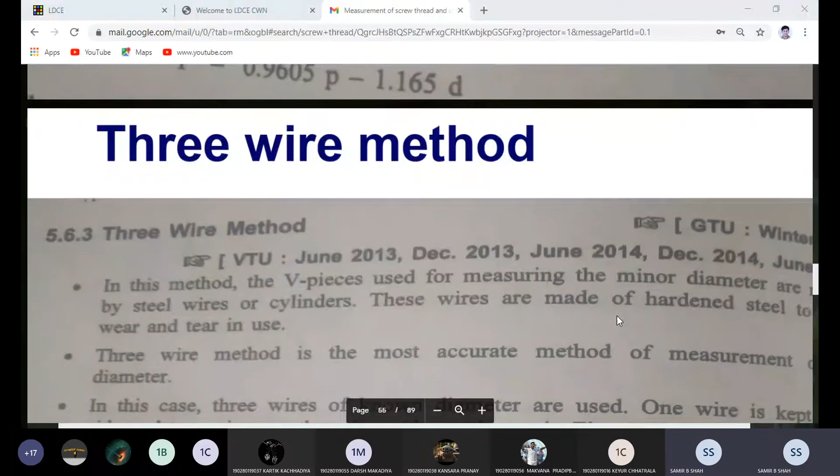2-wire method, we prefer the 2 wires. But let's talk about the 3-wire method, which is definitely used in place of the 2-wire method.

We have to use 3 wires as shown in the figure. As discussed, V-pieces are used to measure the minor diameter, which are replaced by the steel wire or cylinder. These wires are made of hardened steel to sustain wear and tear in use, as I discussed initially.

Remember that the 3-wire method is the most accurate method for measurement of pitch diameter. Sometimes it may be asked in your exam which is the accurate method to measure the pitch diameter, with 3 options like 1-wire, 2-wire, or 3-wire method. Then the 3-wire method is the right answer.

In the 3-wire method, as the name suggests, we use 3 wires. One wire is kept on one side as shown in the figure, and the remaining 2 wires are on the other side.

We also assume that the wire touches the flanks of the thread, and the micrometer anvil is placed parallel to the thread. This is the pre-condition when we use the wires.

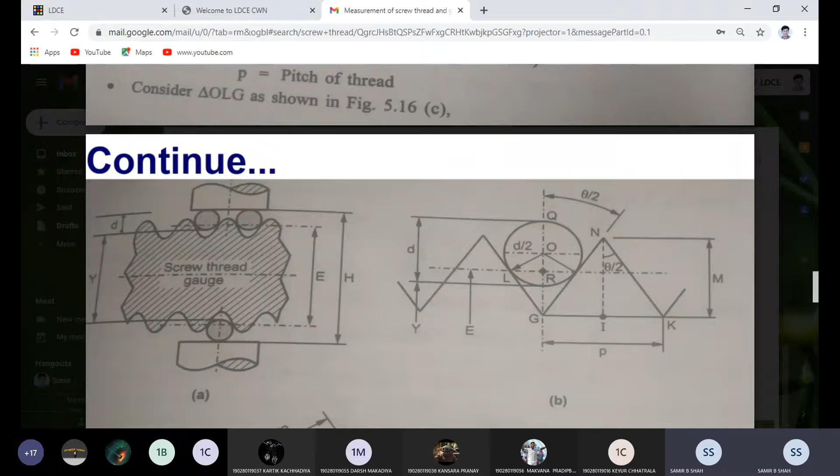It must touch the flank, all 3 wires, and the micrometer anvil is placed parallel to the thread axis. You have to also mention this, because in the one-wire method it is not mandatory to place the anvil parallel to the thread axis.

But here, this is the thread axis, and the anvil must be parallel to the thread axis. The wires are held in hand or hung from the stand so that the wires can adjust themselves under the pressure of the micrometer.

Now you can see in the diagram. Every time the diagram is more important. From the diagram, you have to just solve or complete the process. We have to find this h.

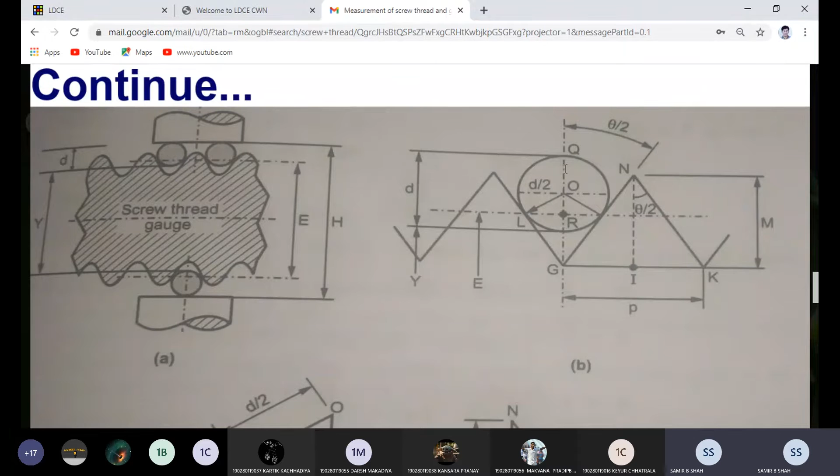As we know that OQ is already with us. OQ means it's a radius, which we consider as d by 2. Now the remaining thing is OR, which we have to find initially. So we are finding OR step by step.

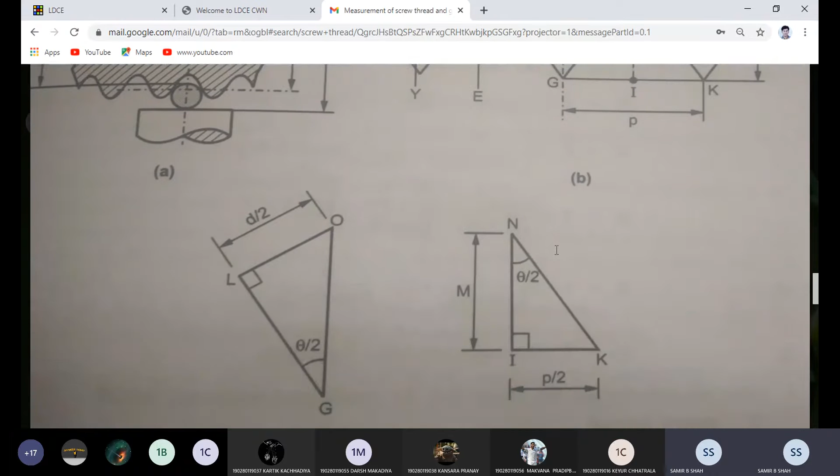As we know, in this figure we talk about the 3-wire method. This is theta by 2, and same way this is also theta by 2. We focus on one figure of theta by 2, and let the vertical line be the flank portion, and that may be OL. So we know that this is the half radius.

We are focused on this diagram. That may be d by 2, as we know, and this is theta by 2, and we are focused on OG, and this may be the end point. It may be the tangent or flank portion.

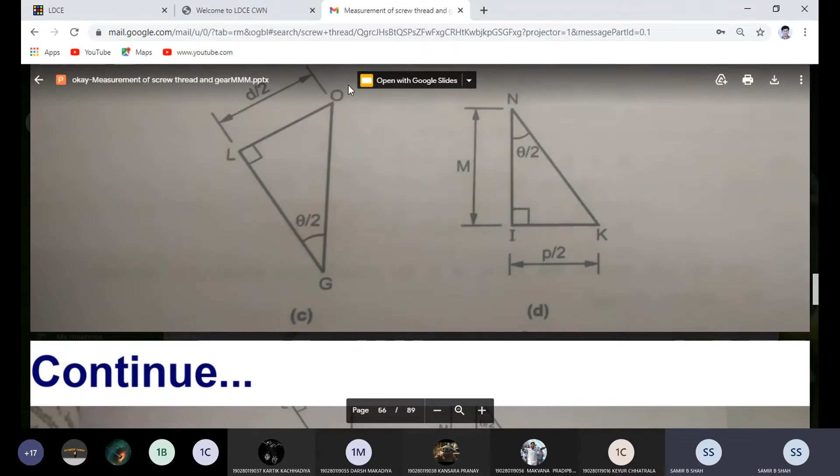So sine theta by 2 is equal to OL by OG, as we know very well. Sine theta by 2 is equal to OL by OG. So OG is equal to OL by sine theta by 2.

Or we say that OG is equal to, you just prefer here, OL which is d by 2. So in place of OL, we have d by 2 into 1 upon sine theta by 2, or we say that d by 2 sine theta by 2.

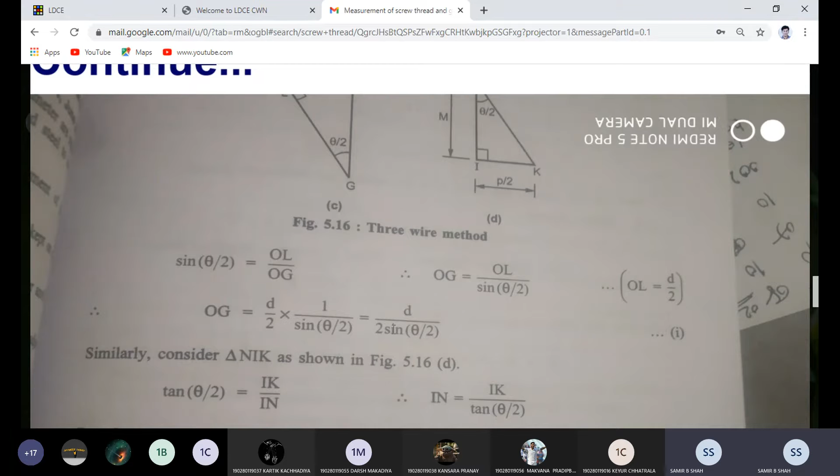Now, as we proceed for the 2-wire method, initially we find OG with the help of sine theta. Same way, here we find it with the help of tan theta. So you just see the same figure here.

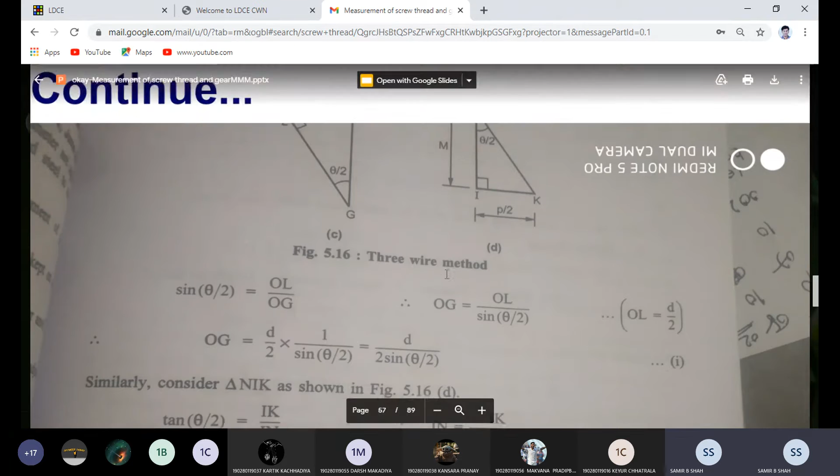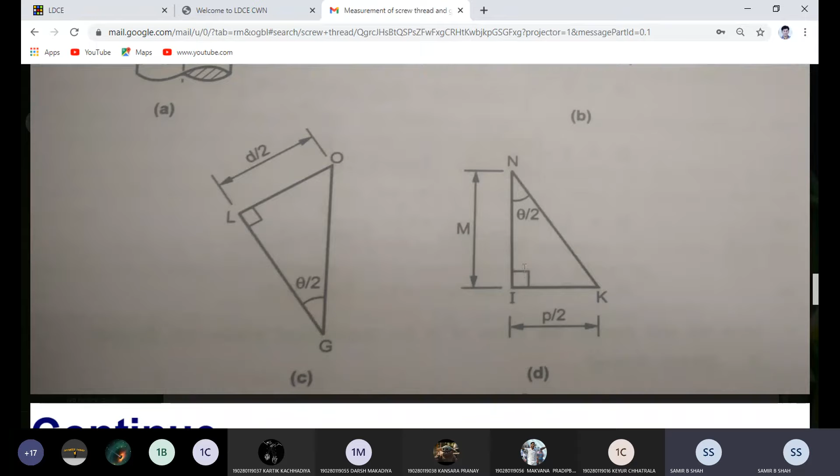That is triangle NIK, where tan theta by 2 is equal to IK by IN. As we discussed in the 2-wire method, so we follow the same thing here. So IK is P by 2, and this we consider as M.

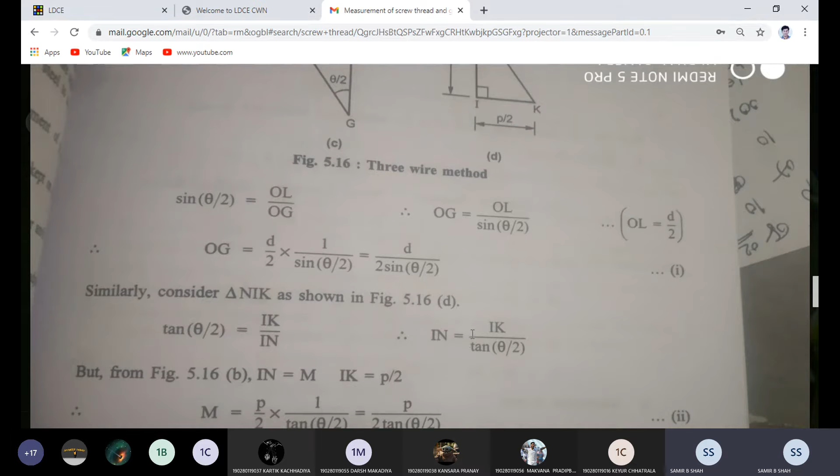So tan theta by 2 equals IK by IN. So IN is equal to IK by tan theta by 2, as we know IK is P by 2 from the figure. So M is equal to P by 2 into 1 upon tan theta by 2.

We have kept sin theta and tan theta the same here. While in the 2-wire method, in place of sin theta we convert to cosec theta, and tan theta we convert to cot theta. So that is the minor difference when we solve the 3-wire method.

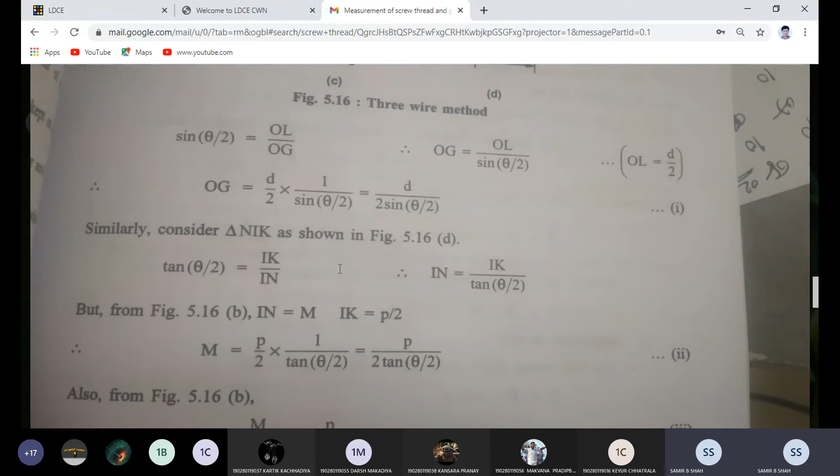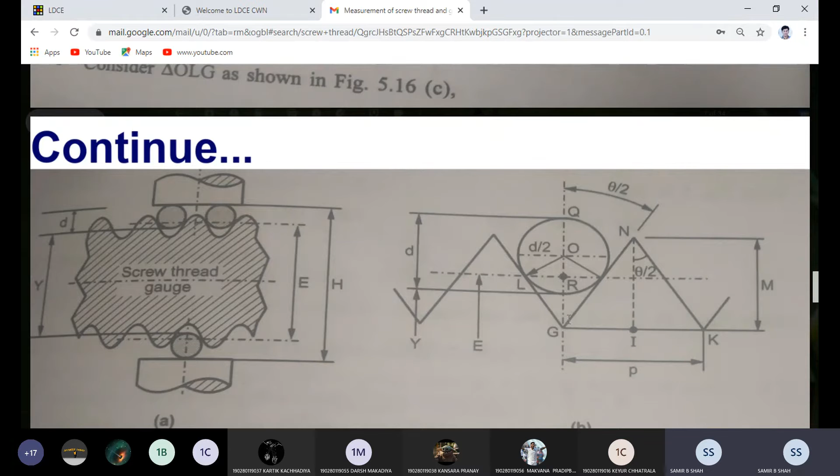Now just see the figure. RG is equal to M by 2. We are finding, if I want to find RG, then you just see the figure. So it is very clear in your mind that RG is equal to M by 2, and already we defined M.

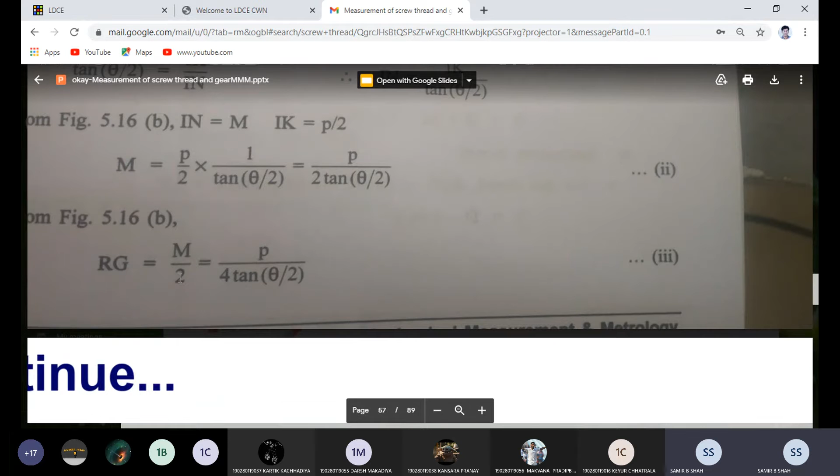So M is equal to P by 2 tan theta by 2, and in place of here also 2 is there, so P by 4 tan theta by 2. Now we are very near to the answer that we want.

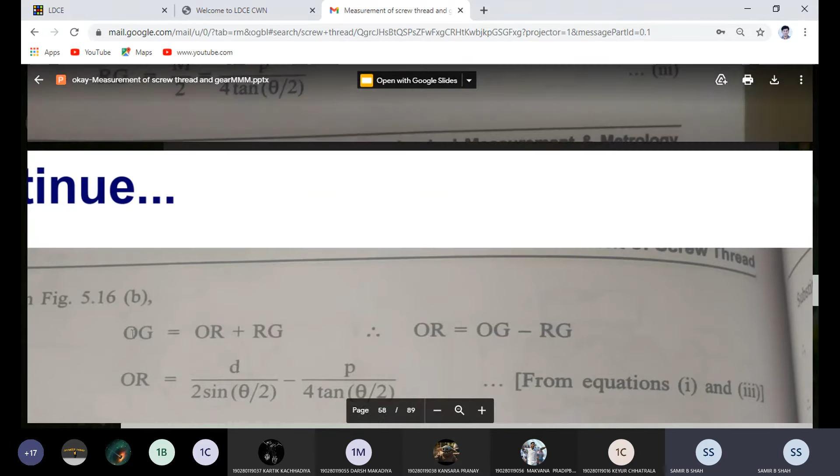Initially OR, and for OR, for H we require OR, so OG is equal to OR plus RG. From the figure we say that OG is equal to OR plus RG. So now we are applying the derivation which we are getting for OG and for RG. OR we have to find, so OR is equal to OG minus RG.

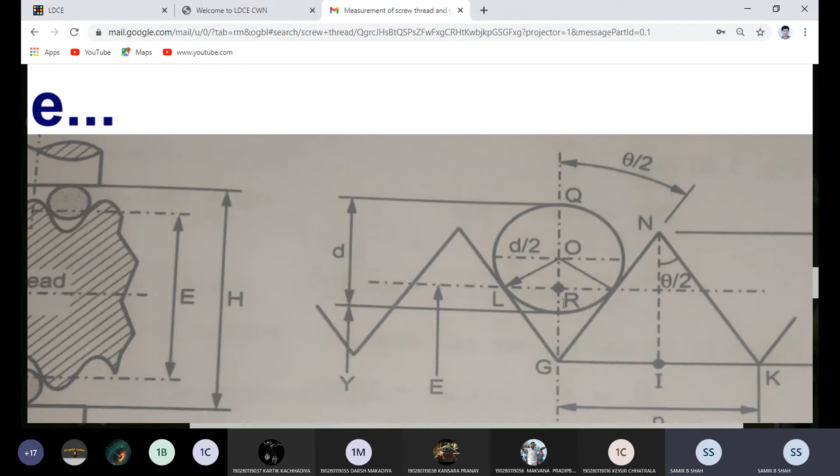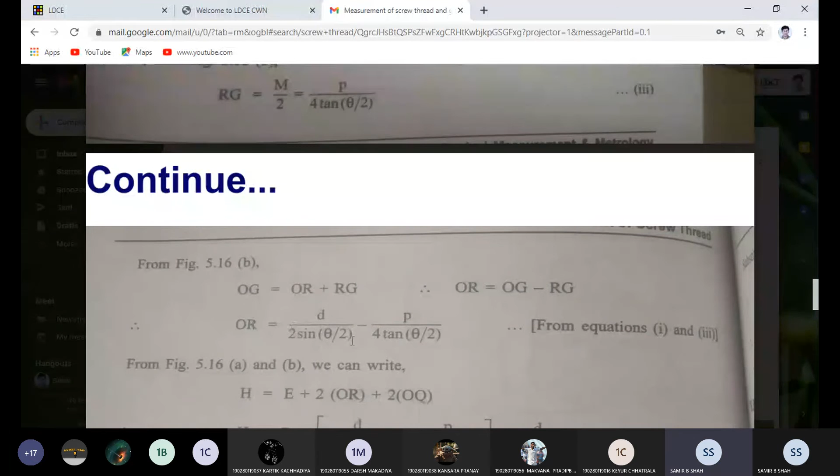OG means D by 2 sin theta by 2, and RG means P by 4 tan theta by 2. As we already defined both the points, we just put in the value of OG minus RG, so OR is equal to D by 2 sin theta by 2 minus P by 4 tan theta by 2. Now, as initially discussed, I want to find H.

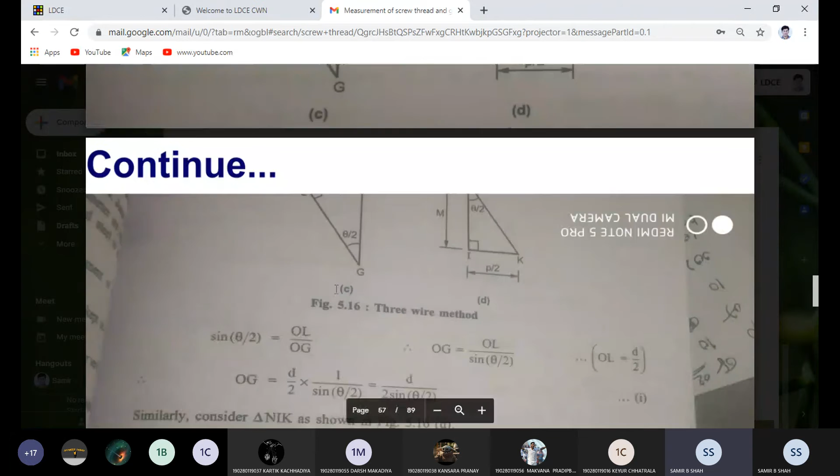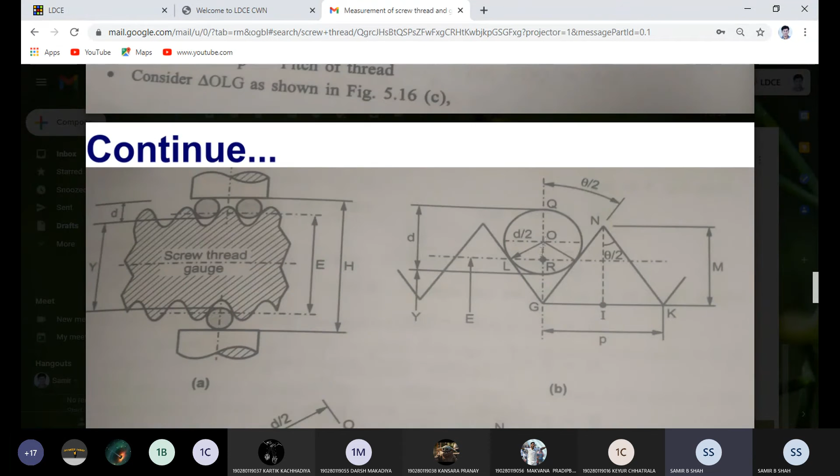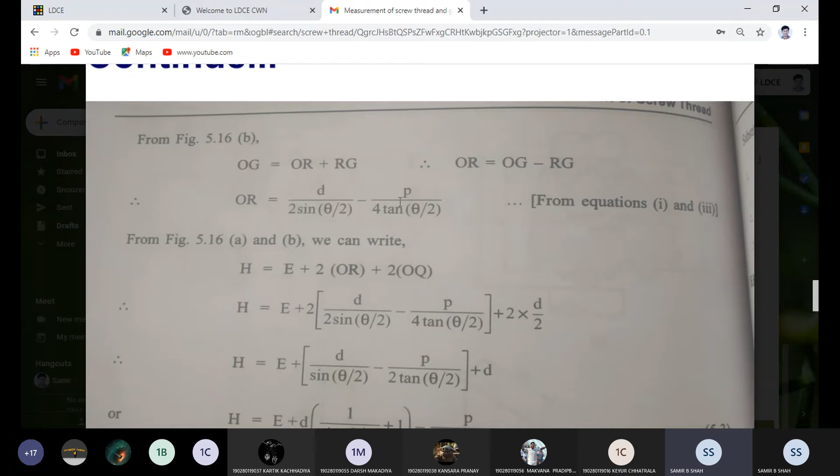H is equal to E, that is predefined, so E plus twice of OR, I repeat twice of OR, plus twice of OQ. So I just put the value of H is equal to E plus twice of, in place of OR I just put the value that is D by 2 sin theta by 2 minus P by 4 tan theta by 2, plus twice of OQ means D by 2. I put that value, so I am getting at the end the value of H.

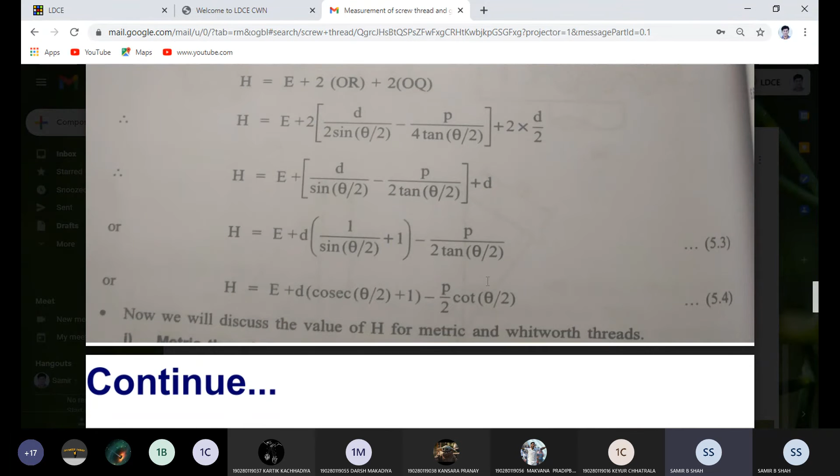Now we know that for metric thread there is one equation, and same way for Whitworth thread there is another equation. So for metric thread, when we prefer for the H, we use that equation. To find effective diameter, we know the equation: major diameter minus depth of the thread, that is 0.6495 p. Initially we discussed the 2-wire method, so D minus 0.6495 p.

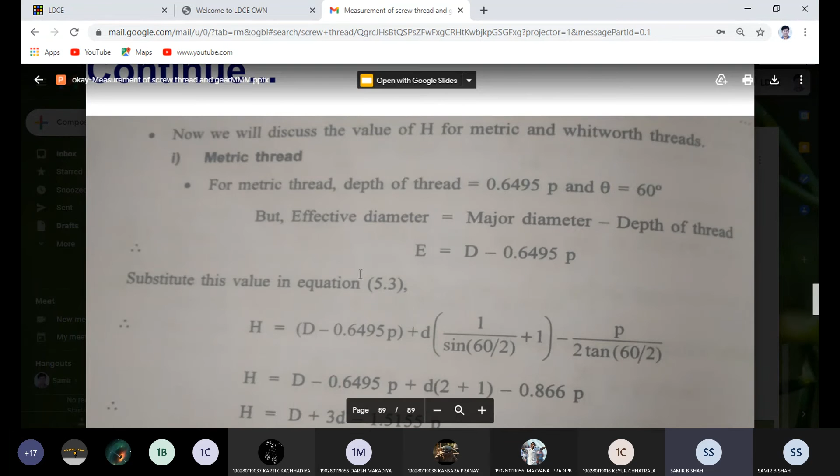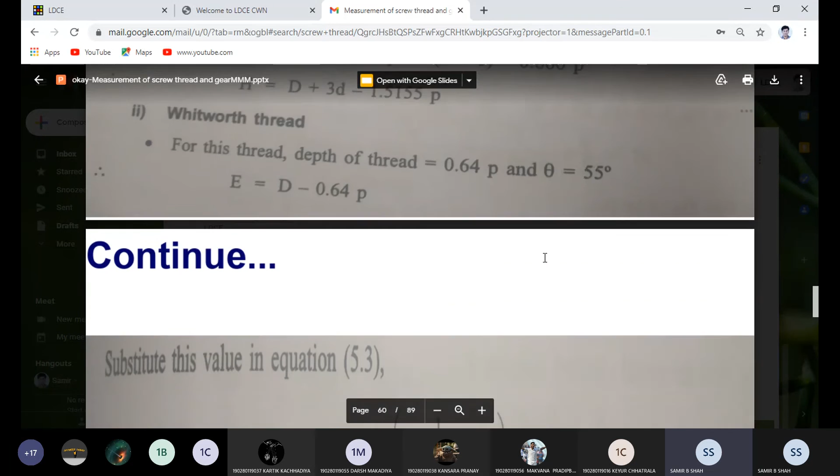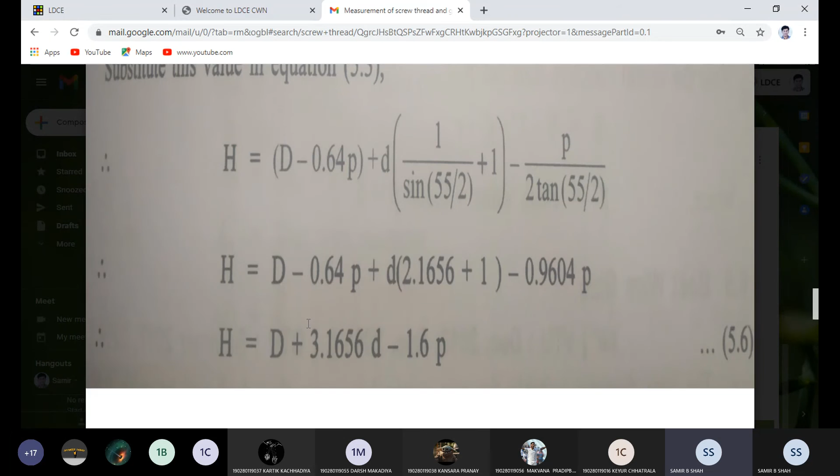In place of E, we put that value and find the value of H, and same way for Whitworth thread, where in metric thread we preferred theta equal to 60 degree, while in Whitworth thread theta is equal to 55 degree. So the last equation for Whitworth thread is D plus 3.1656 d minus 1.6 p. So you have to remember that.

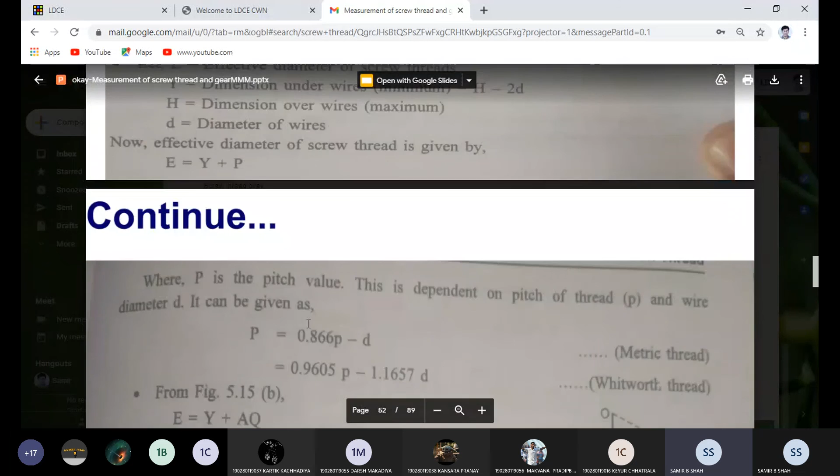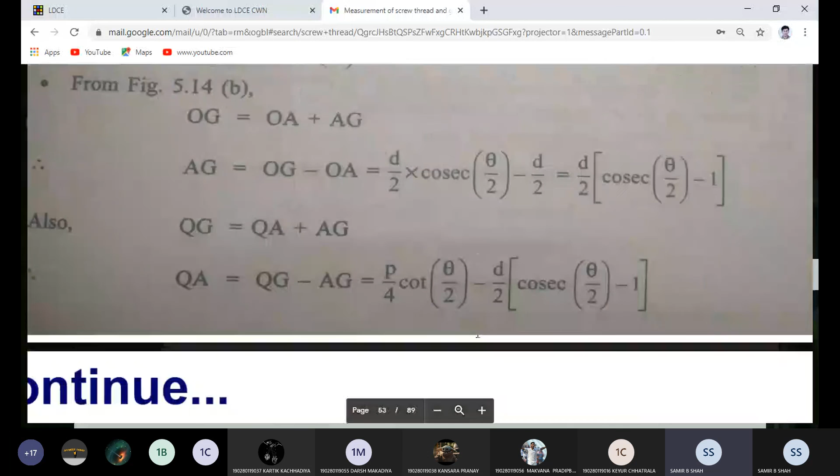Many times the theory from this may be asked in your exam, so you should be ready for both the 2-wire method and 3-wire method. Both times your figure is important. If you draw the figure properly, then definitely you can just find sin theta first, then tan theta, and then as per the geometry you define everything. It doesn't matter with the notation as per your point of view, but if it's clear in your mind, then you have to find H.